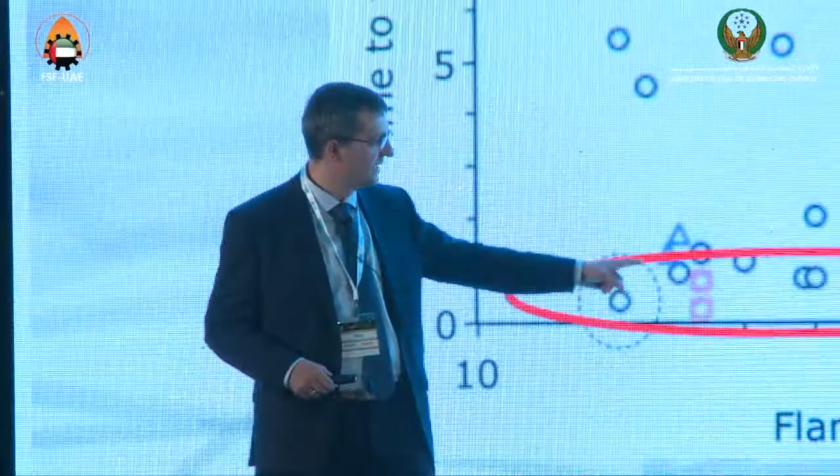And my point here is that based on the study by Dr. Babrauskas, which is an American study, so there is no bias towards Europe, all these materials in the red circle tested in the Steiner Tunnel will result in flashover in less than 1 minute. The rating, because the flame spread index is between 3 and 75, so we're talking class A and B, so-called very good materials, but in real fire, they will contribute to flashover very, very quickly. So basically, not all materials can be tested in the Steiner Tunnel.

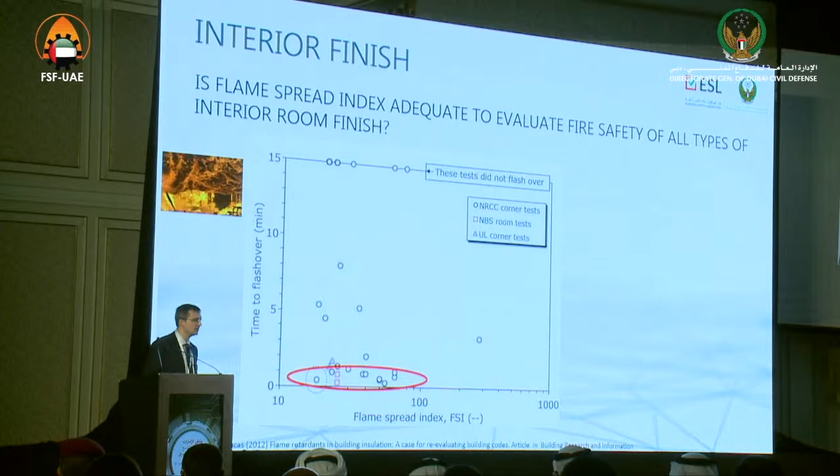And those of you who know this method will answer me that, of course, the recent version of the ASTM or UL standard requires a note to tell the audience that some materials may not be appropriate for Steiner Tunnel. But who should address it? There is a note in the test report, but is the consultant who is developing a project aware whether this material is good from this test or not? The test should give an ultimate answer. Is the material safe or not? And in our opinion, this method for some internal linings may give results which are, let's say, confusing.

The more advanced approach is to measure heat release rate, basically to measure the amount of heat which is evolved during the combustion of a given material. And just to give you an example, a small waste basket will result in a peak heat between 20 and 50 kilowatts. So we operate in scientific units which are comparable to the real fire scenario. A fully involved fire in a bedroom is between 1 and 4 megawatts, compared to a car fire, where a modern car can reach even 8 megawatts. So the measurement of the heat release rate, in our opinion, is a step forward.

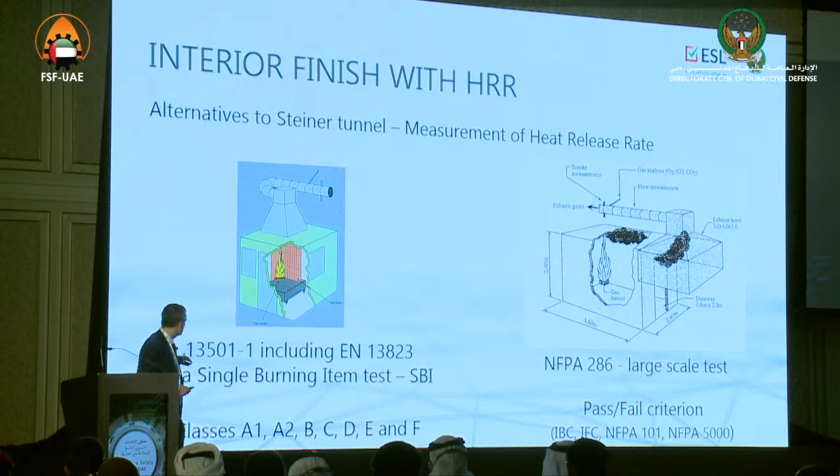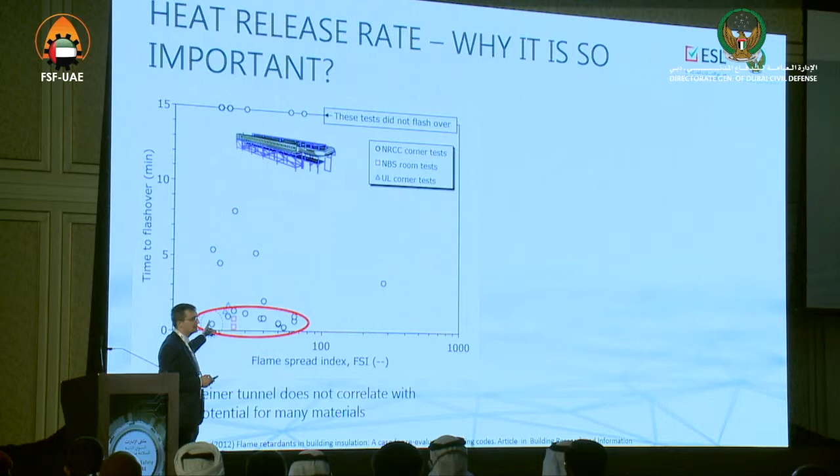And of course, both European and American standards have a space for more advanced techniques like measurement of heat release rate. In Europe, it's single burning item. In the United States, NFPA 286, the so-called room corner test, with a pass-fail criterion, which is in many building codes now in the United States. Single burning item results are classified according to the European standard, as given here. As I said before, Steiner Tunnel results for many materials don't correlate with flashover. And as I said, we want to avoid flashover as a potential really life-threatening situation in a room.

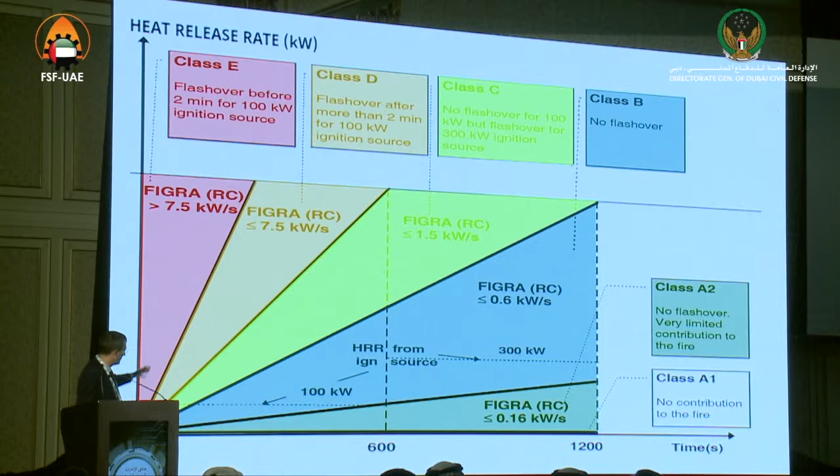So now let me explain how heat release rate and the new measurement techniques are linked to the potential of flashover. So on this graph, on the vertical axis, we have the amount of heat which goes out of the sample during the combustion. On the horizontal axis, we have time. And when we take our extruded polystyrene, it gives a very high peak very soon. So this is the red area, really no-go, class E or F. And as you can see, in less than 2 minutes, the flashover in real fire will happen.

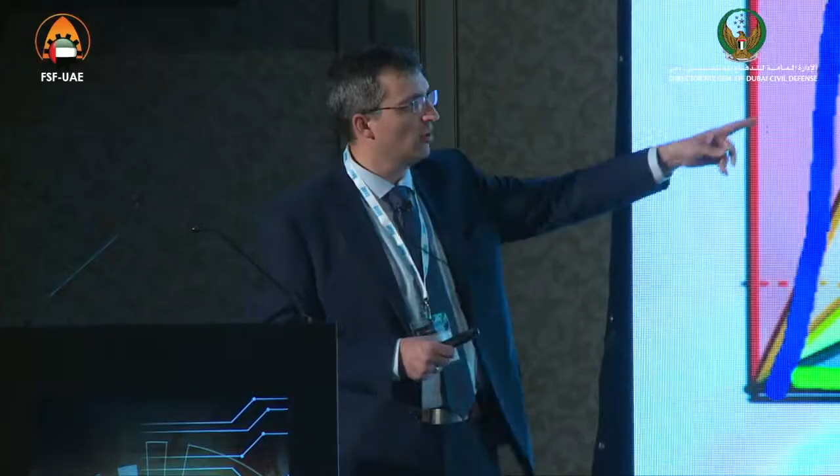When we take another material, which slowly goes to the peak, this material goes to class B. There is no potential of flashover. So basically, the contribution from this material to real fire is very, very limited. And then accordingly, we have class C and class D, which fall in between. So the flashover will develop after some period of time. And the final point is that we strongly believe that more advanced measurement techniques will heavily influence the safety level here and beyond.

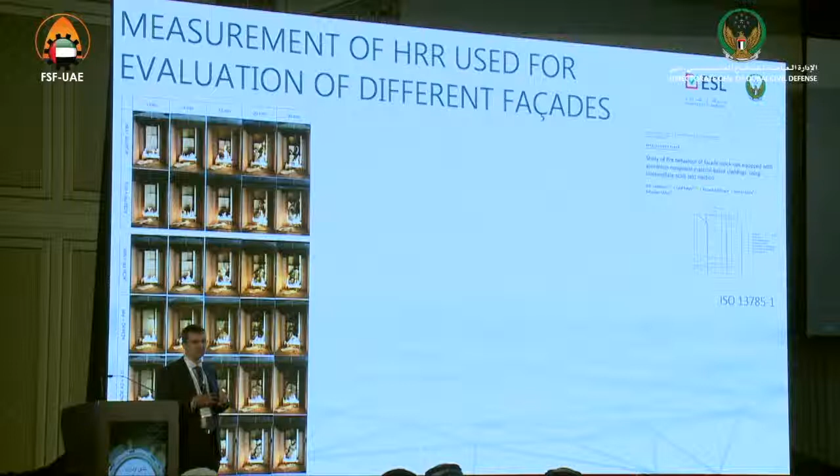And now, because the facades are really under investigation right now, let's put it this way. I understand that some of the other speakers today will also address the Grenfell Tower investigation in more detail. But what I wanted to show you today is that the measurement of the amount of heat which comes out of the sample during combustion, which is really a physical phenomenon, can really help during the assessment of different facade behavior. This study, I'm one of the co-authors, was published last year.

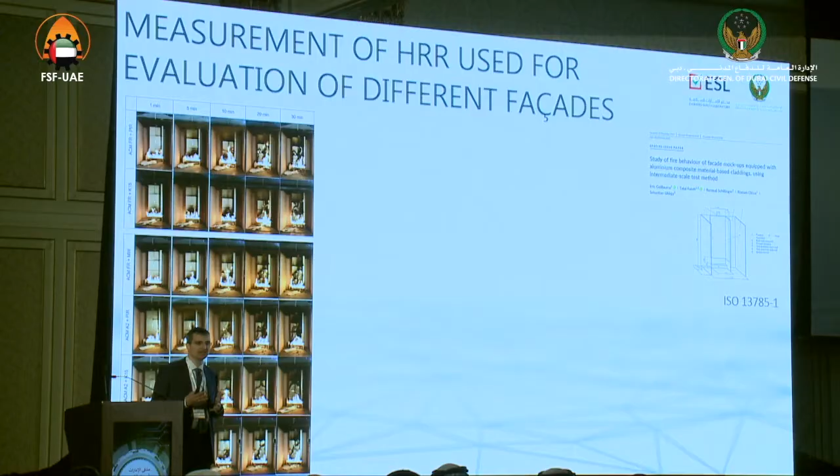The main author was Eric Guillaume, and during this study, we look at how different facades will behave during the fire, but we measure the heat release rate. So when you look for BRE reports from Grenfell Tower materials, because of the size of the fire, they had to stop the test just when the fail criteria was reached. What we did here, we took a small-scale sample, 2 meters by 1.2 meters, so let's say 4 square meters sample of a facade, and burn it according to ISO 13785 part 1, which is intermediate scale test, but we measure the amount of heat.

And these results are on Fire and Materials website. This is open access, so you're more than welcome to check it. But what I wanted to show you, when you look at those images, you don't really see a difference. When you look at the temperatures, you don't see much difference because it's an intermediate scale test. But when you look at how much heat is released, measured in a scientific way by oxygen consumption, you clearly see that the cladding and type of the insulation material behind is really contributing, making the difference.

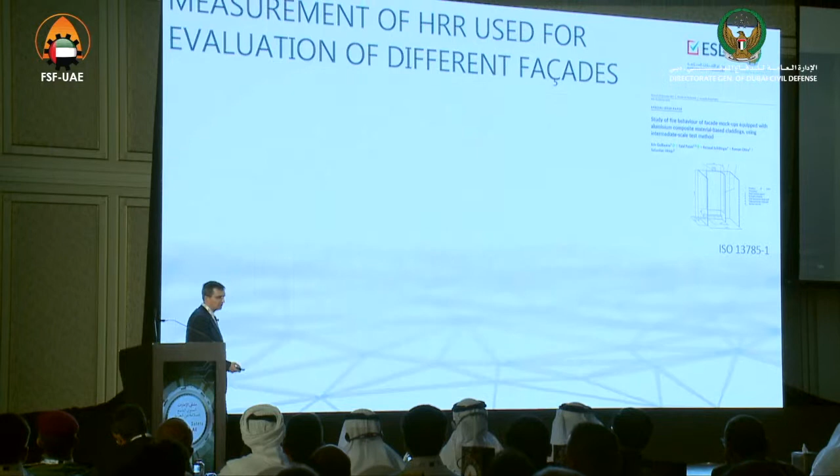So here we see that ACM A2 on the mineral wool is behaving twice as good as, for example, ACM just fire retardant cladding with PIR insulation. But I want to show you the extreme. Now we look at the Grenfell Tower. So all the results you see on the previous slide, all these results are completely flat here.

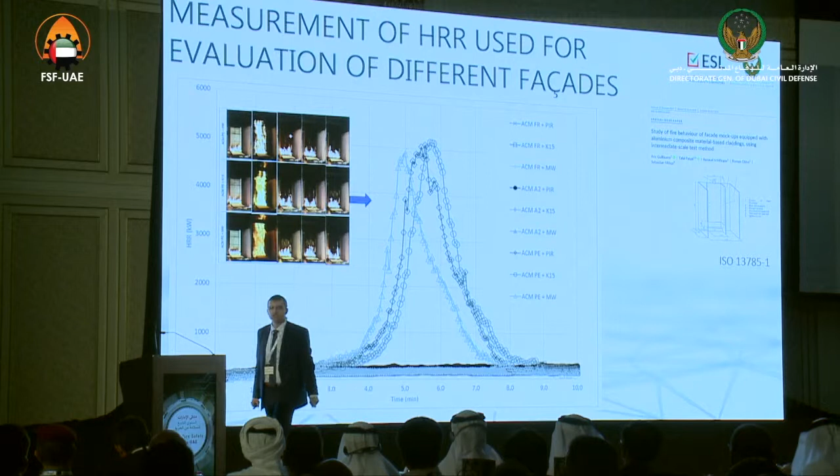We're talking about 300 kilowatts out of 4 square meters sample of a facade. These 3 peaks, you may not see it clearly, but they reach 5 megawatts. So it's the size of a car fire, and we're talking about 4 square meters of a facade. So 4 square meters of a, let's say, bad facade will result in a fire the size of a car. Now multiply it by the area you have on the tower blocks, on the high-rise buildings.

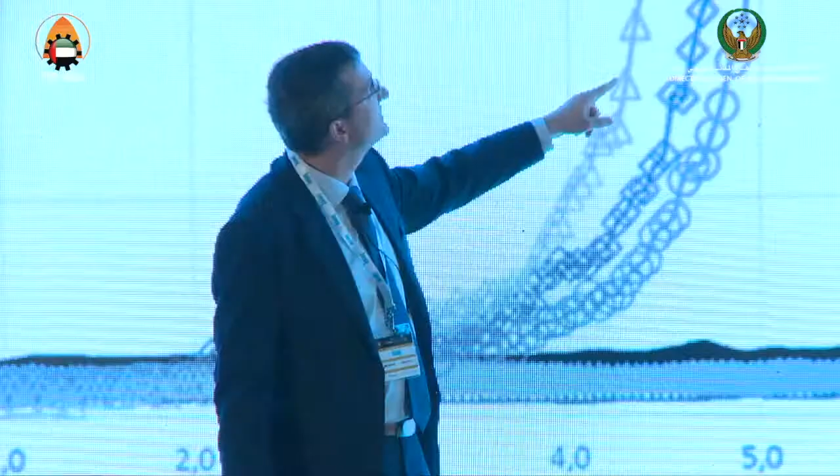Just to give some explanation, these 3 results will reach about 5 megawatts. The one in the circle, it's ACM on polyurethane. The one with the squares is exactly what you have on the Grenfell Tower. And the one which is slightly quicker here, it's claddings from the Grenfell Tower, but the backing material is mineral wool. So you clearly see that with a non-fire retardant polyethylene in the cladding, it doesn't matter if you have the mineral wool behind or not, because this clearly demonstrates that the cladding itself really was the main culprit.

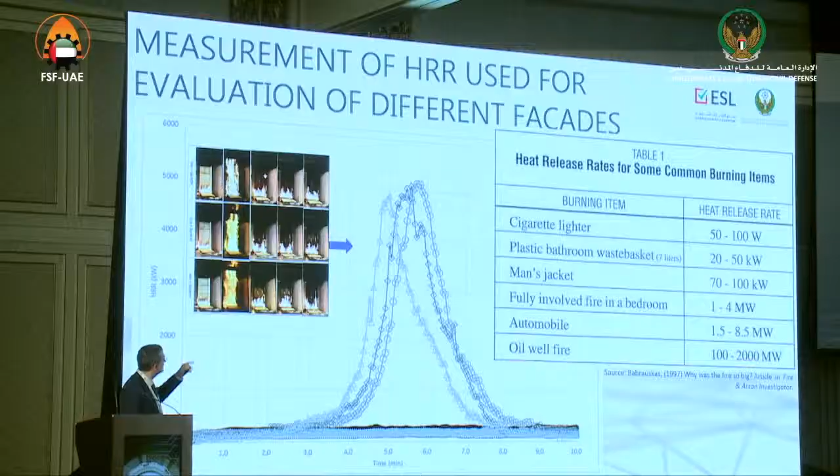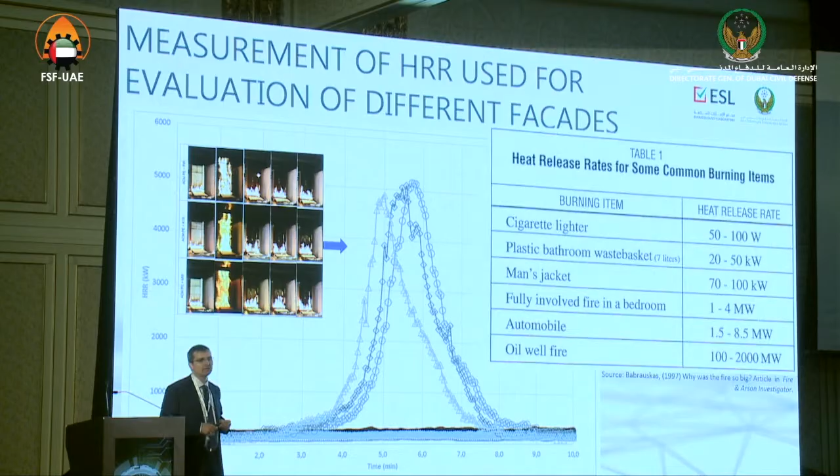Yes, the previous slide showed the insulation also making the difference, but this clearly shows how the measurement of the heat release rate, so how the modern advanced measurements can yield us information which some of the standard fire test reports are not able to answer. And the point here is that when we use the modern techniques, we can really enhance the fire safety here and, of course, beyond. And just a comparison, I said this was a 5 megawatt fire as a peak, and modern cars, as checked by BRE a few years ago, can even reach 6-8 megawatts as a peak heat release rate, so the amount of heat released.

I'm reaching my conclusion now. So I showed you that there are differences between the fire testing standards for similar building elements or materials or products. I'm leaving you to reach the conclusions yourself, but the differences were presented. We strongly believe that modern test methods using heat release rate measurement as a scientific approach can be very beneficial for the fire safety here and beyond, because they clearly demonstrate how the materials will behave in a real fire, and that's our goal. The goal is not to have materials just ranked. We want these materials to behave as they should, as expected during the real fires, which we cannot avoid,

at least now. And final point, measurement of heat release rate can really help us to assess the facade behavior, which is not currently the scope of the fire testing standard.